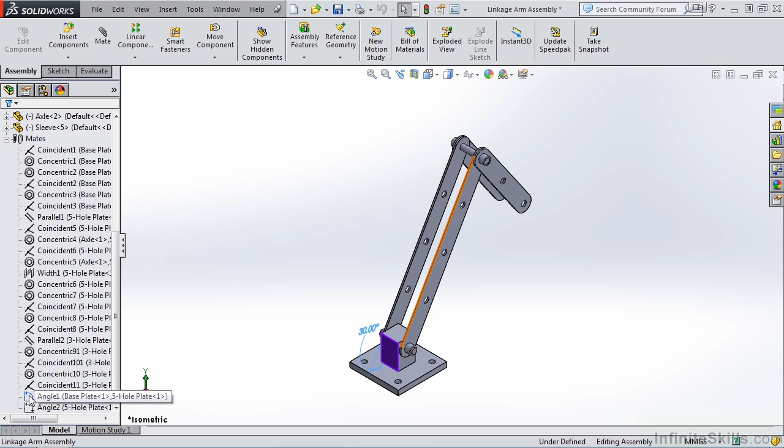So let's do that. I am going to open up the linkage arm assembly. I'll expand the mates, and at the very bottom, notice we have our angle 1 mate. This is the one that we're concerned about for this lesson. And then we have an angle 2 mate. I am going to double click on the angle 1 mate. I am going to right mouse click on the 30 degrees.

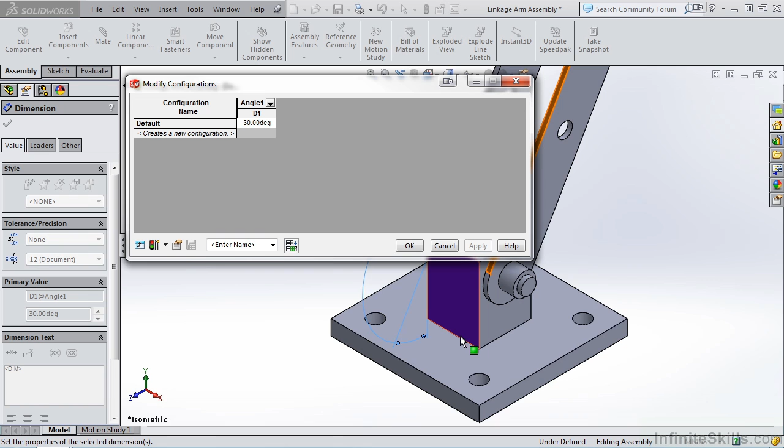A menu opens up, and notice I have a selection for configure dimension. This is what we want to select. This is how we can create that 60-degree configuration. As soon as I select it, a dialog box appears with a default of 30 degrees. I'm going to create a new configuration. Let's call this new configuration 60-degree configuration, and the angle will be 60 degrees. We'll apply it and then select OK.

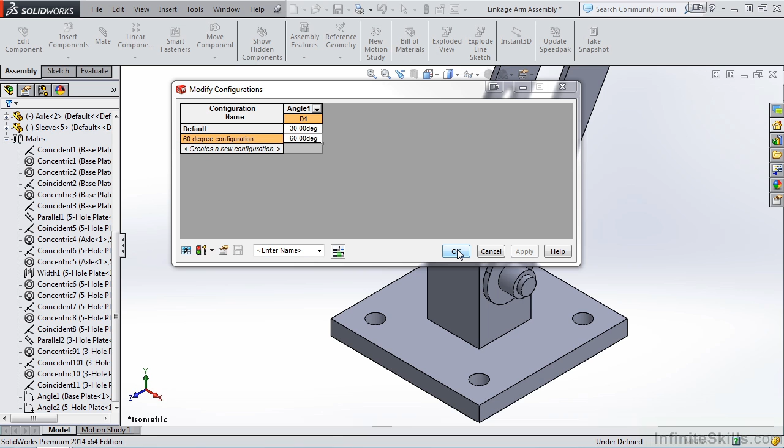Now, before I select OK, realize we now have two different configurations for this one assembly, a 30-degree and a 60-degree. So I'm going to select OK. I am now ready to go back into the drawing environment. And now, since I have that 60-degree configuration completed, I can select alternate position view. As soon as I select it, I'll be prompted to select a view on the sheet for the alternate position.

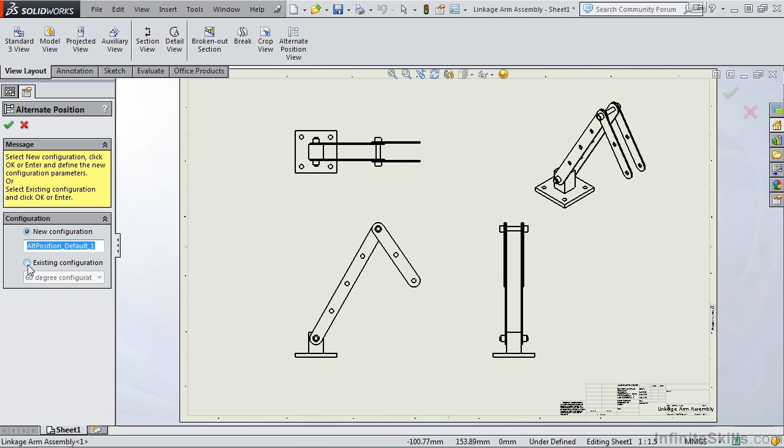And notice I have two different choices here. I can create a new configuration, or I've already created a 60 degree, so we want to use this one here. Use an existing configuration. And there's my 60. I'll select the green check mark. And notice on the screen, if we zoom up on this, this is the original 30-degree configuration and my new 60-degree configuration in phantom line type, just like it should be.

So that is how you create alternate position views. It's fairly easy, and it's one of those commands, after you use it a couple times, it becomes second nature.